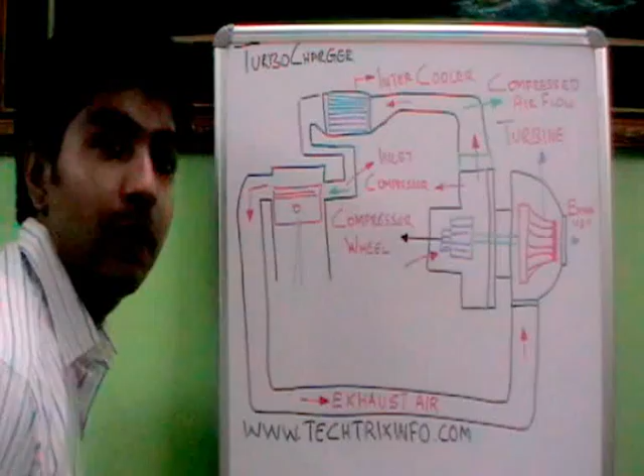Hi friends, today we'll be talking about the working of a turbocharger. I have drawn the whole circuit of a turbocharger here. We'll discuss the components of a turbocharger, the working of the turbocharger, and why a turbocharger is used.

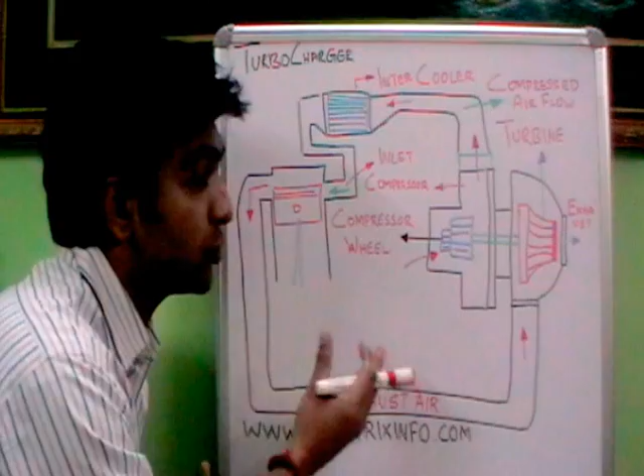Let's see all the components. This is the engine over here, here we have the turbocharger unit, and here we have the intercooler. So these are the three main components involved in the process.

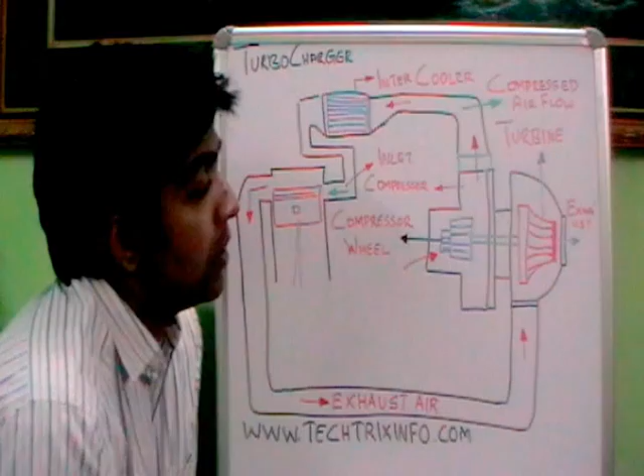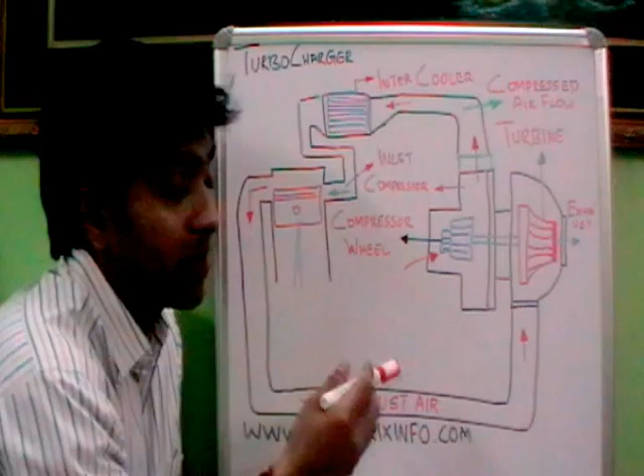Let's talk about why a turbocharger is used in an engine. Most modern generation automobiles are coming with a turbocharger in it. It is used to improve or increase the torque and horsepower of an engine. So with smaller engines to produce more horsepower, a turbocharger is used. It is coming as a standard fitment, or we can install a turbocharger to an engine after the purchase of the vehicle, if we need a higher horsepower from the current engine we are having.

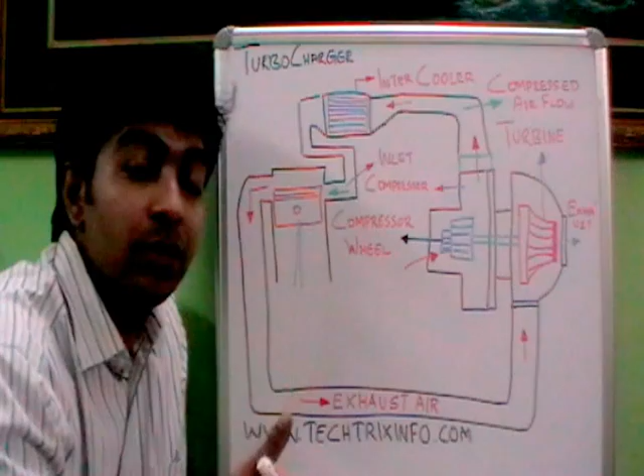So how does a turbocharger increase the torque and horsepower? The turbocharger is capable of producing about 50% more horsepower to a standard engine. What it actually does is that for more power, what we need is more combustion. If more fuel is burned inside the engine, more power will be produced.

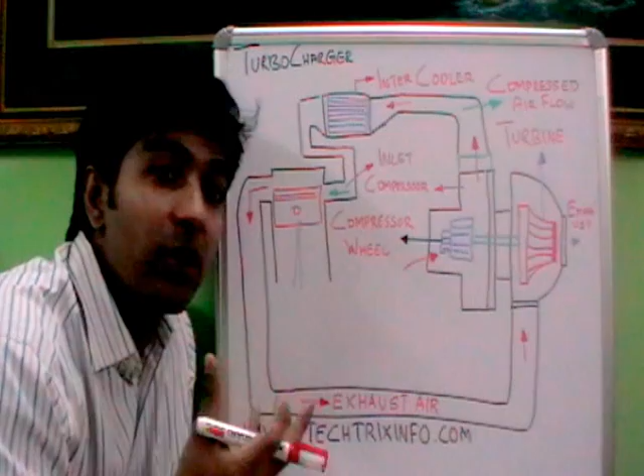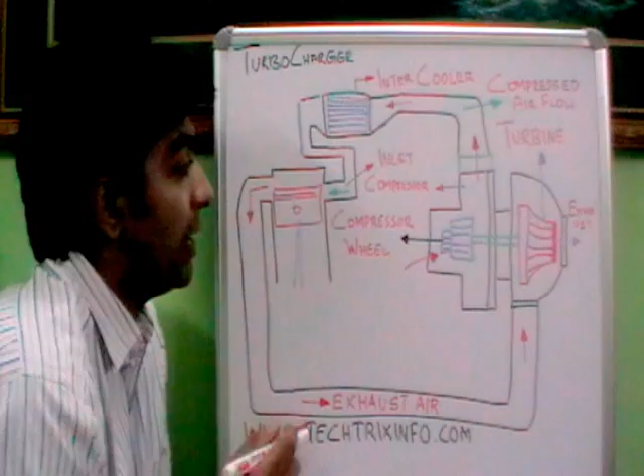So if more fuel needs to be burned, we can provide more fuel into the inlet manifold, but it should be assisted with the required amount of air or oxygen inside the inlet manifold. That is, a 14:1 ratio of air to fuel is required for proper combustion to happen. So what a turbocharger does is it gives pressurized, more quantity of air into the inlet manifold, so that we can supply more fuel to the engine and more horsepower can be produced.

Let's see how the turbocharger actually does that. The main components of a turbocharger are the turbine and the compressor wheel. So you can see the engine when it is working, we will be having exhaust coming through here. This is the exhaust port.

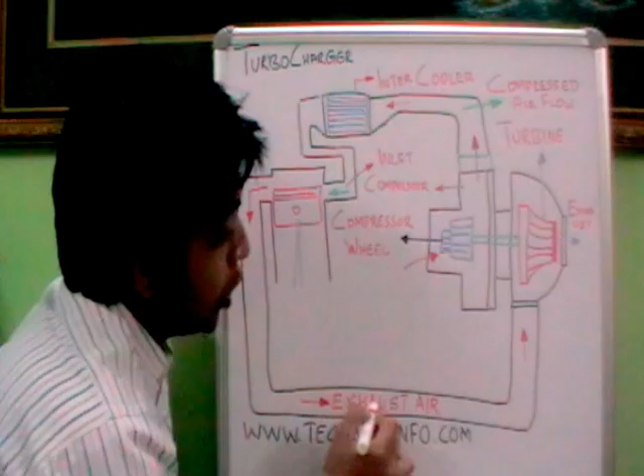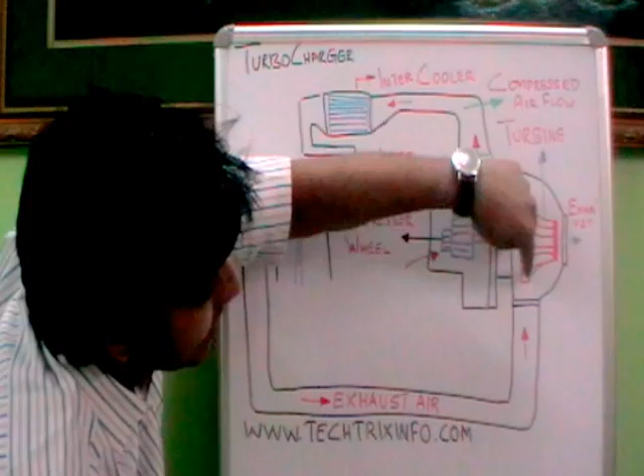The exhaust smoke will be coming through here, and it enters the turbocharger turbine unit. So this casing, we have the turbine installed inside, so it will be coming and hitting the turbine over here. This marked in red is actually our turbine. So the exhaust gas comes and hits the turbine, which results in the turbine spinning.

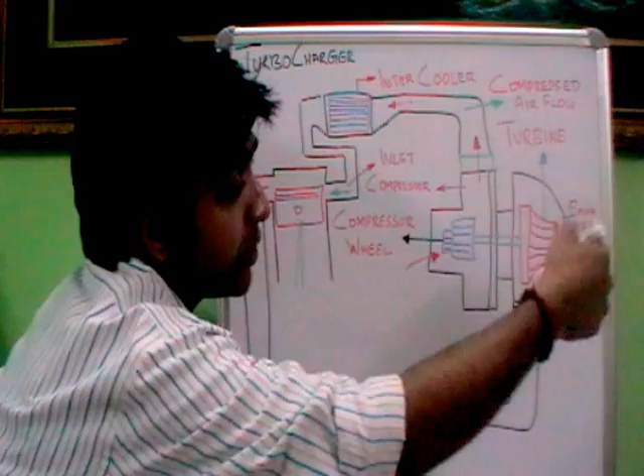The turbocharger is rotating at an RPM of 1 lakh to 1,50,000 revolutions per minute, that's about 30 times faster than that of an engine. As the turbine rotates at that speed, it is connected through a shaft towards the compressor wheel. So this will result in the compressor wheel rotating.

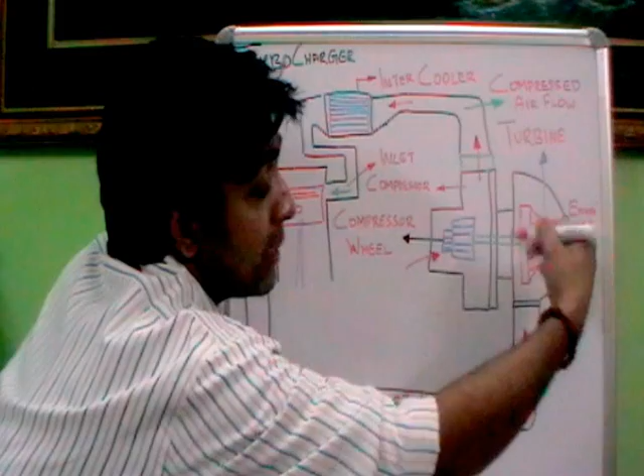The exhaust gas hits the turbine, helps it to rotate, and then escapes through this portion. So the exhaust gas is vented out through the turbocharger, and here it will result in the compressor wheel rotating.

The compressor wheel actually sucks in the atmospheric air from outside, and it compresses it inside. So the compressor compresses the air here, and it moves through the intercooler to the inlet manifold.

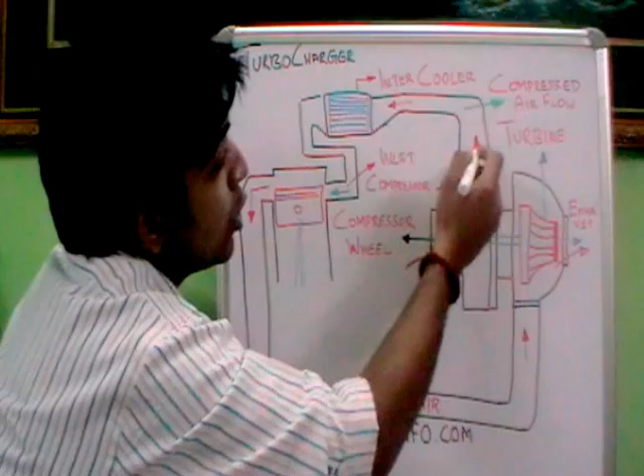So what we are finally getting is that through this exhaust gas, which results in the turbine rotating, in turn through this shaft, the compressor wheel rotates, and the compression of the air, which is sucked from the outside, is being supplied towards the inlet manifold.

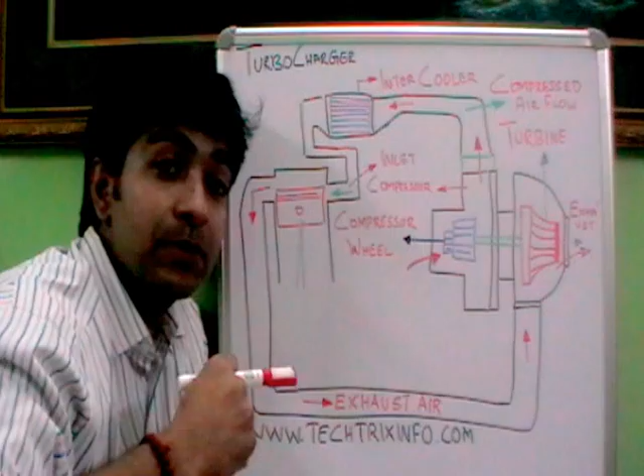So we are getting more compressed air into the inlet manifold, which helps us supply more fuel into the inlet manifold, so that it will be completely burned and more power can be produced. That's how more power is produced in a turbocharger.

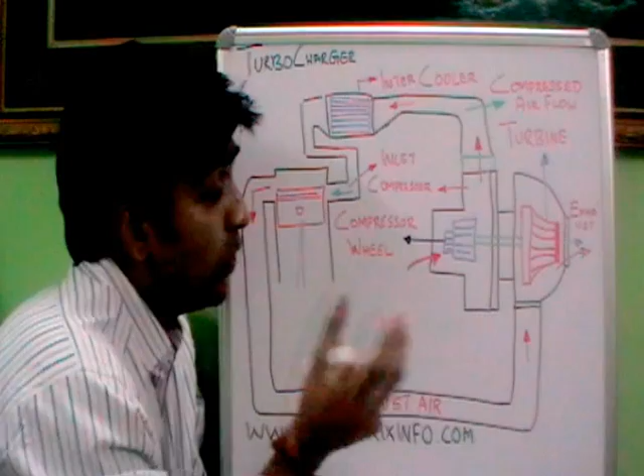At sea level, 14.7 psi, pounds per square inch pressure, is available. But with the help of a turbocharger, the atmospheric pressure which we can make available inside the inlet manifold can go up to 6 to 7 psi more, that is about 21 to 22 psi of pressure can be developed inside here. So that's how a turbocharger provides more power.

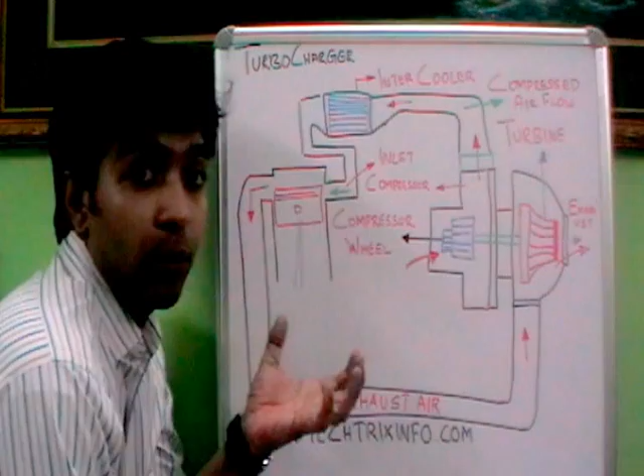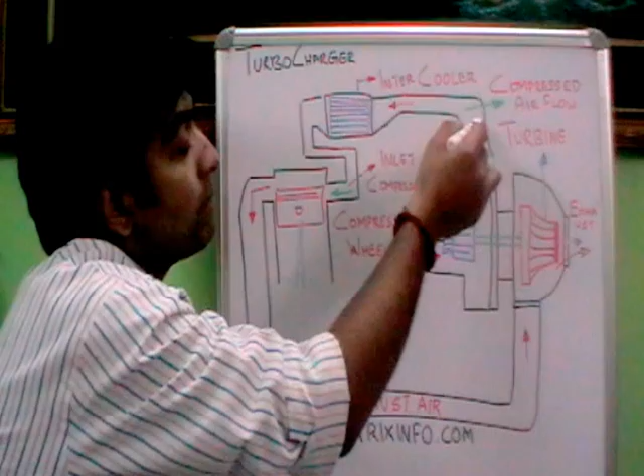Why is an intercooler used? The density of the air will be reduced when it gets compressed, so it will not expand inside here, and that much power cannot be produced if it is not expanding. To avoid that, since the compressed air coming over here will be hot, to cool it and increase the density of the air, an intercooler is used.

So the intercooler reduces the temperature and increases the density of the compressed air coming from here and supplies it to the inlet manifold, and more fuel is being supplied to the engine, resulting in more production of power. So that's how simply a turbocharger is working.